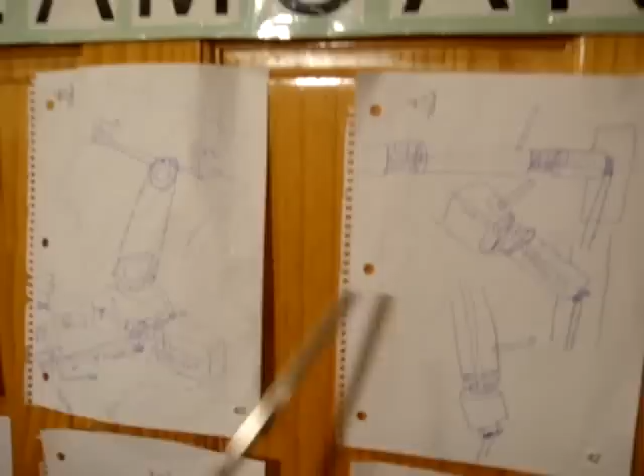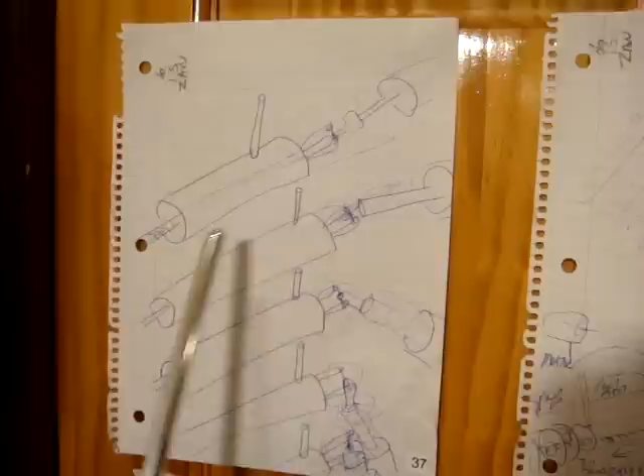These drawings here are the new steering system. This is a joy bar here. And what it does is, see this, the part sticking up, it will start going back and forth and slide right and left. This is also the joy bar. There will not be a steering wheel in the final version of the car.

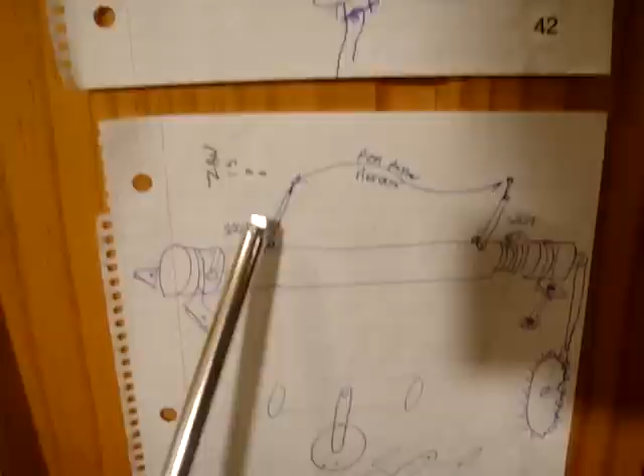And this is another drawing of the joy bar. If you see here, it's spring-loaded on both sides, and it's got two levers up. You just push the levers forward to accelerate and pull them back to stop it.

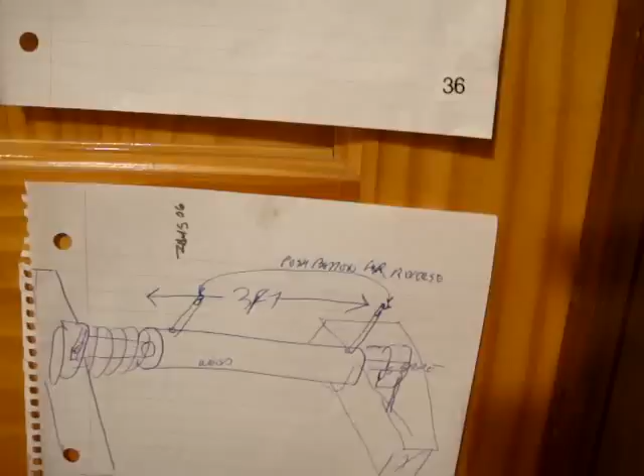Here's another drawing of the joystick, but in place. So it's anchored at both sides of the car. You're sitting approximately right here, and your feet will go under it. It's about 2 foot wide.

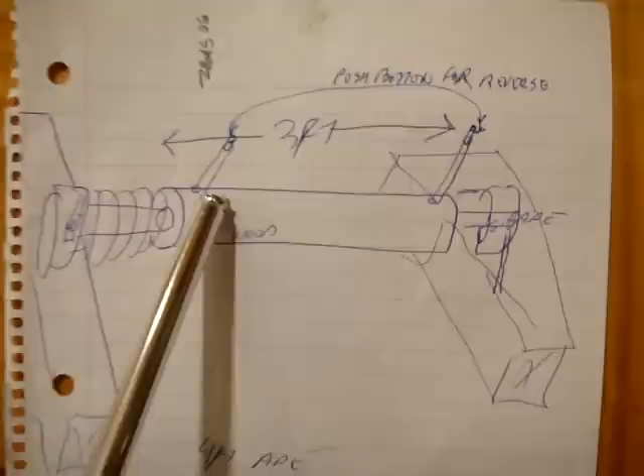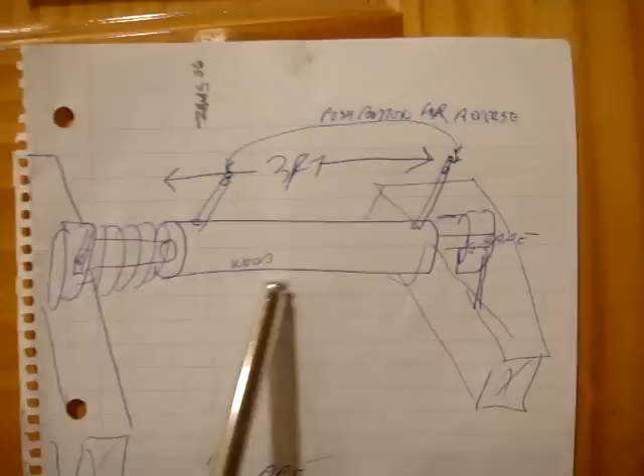And what it does, again, is this stick goes forward, or you can squeeze this bar and roll it forward to go forward, and pull it back to stop, and pull it a little back further to go in reverse. If you see on both sides, it's spring-loaded, so to get the car to turn, you simply move it right and left, back and forth, and that's how the car turns.

These are details of the control, and if you notice here, this is in an up position, to the left, to the left, to the left, to the right, to the right, to the right. This is showing you the control. This drawing here shows the butterfly switch, and we'll show you that in some other parts, and the solenoid.

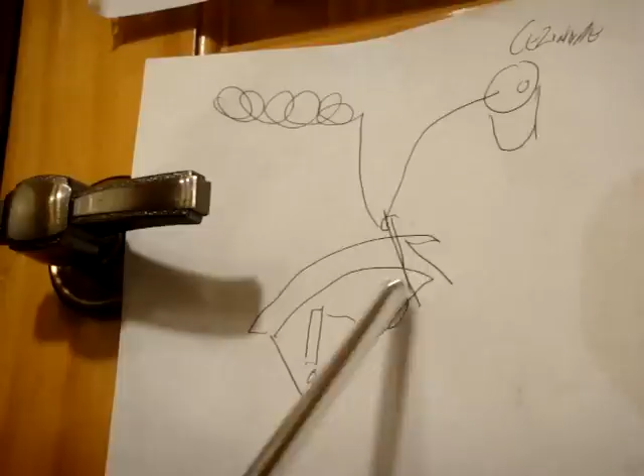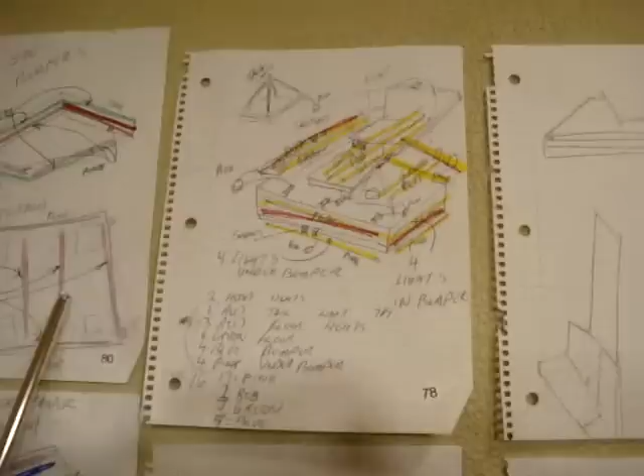Now here's some more drawings, and I'd just like to talk about different ones. This is the drawing of the seat in the center of the car. These are the neon lights that light the body. These are the 3 body sections and how they're placed. And then again, over here is how the top of the framing is above the car frame itself.

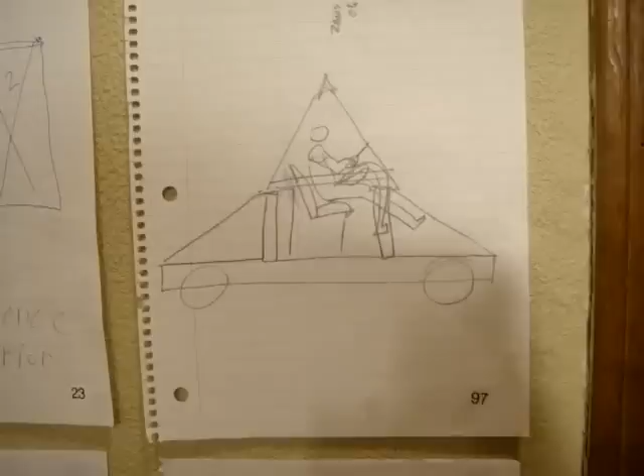This is a detail of the seat, trying to get a man to sit in the seat. Now from this drawing, go back to this drawing, and we're trying to set the man up so he sits in the seat properly. Over here is another drawing of the seat. Here's another drawing of the seat, and here's another drawing of the seat. So what we're doing is we're figuring out how a man sits in the car.

Now this is a photograph, but it's also turned back into a drawing of Gregory driving the car. And this is the final product. His head is back against the back. He's got plenty of space in front of the car.

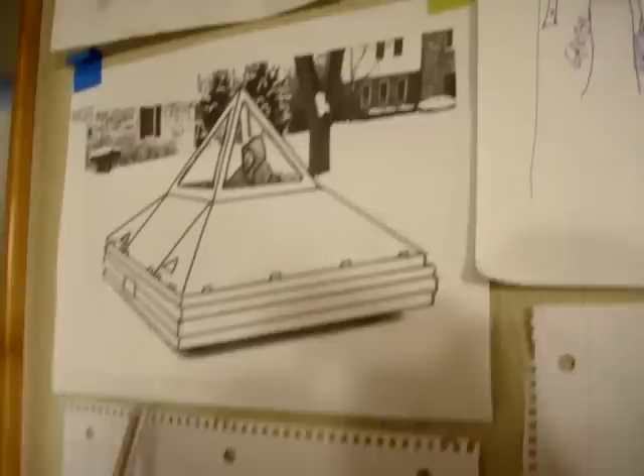Over here are some more drawings. And these drawings here are different parts of the frame itself. So the frame is listed 1, 2, 3, 4, 5, 6, 7, 8, 9, and 10. That's the amount of pieces that it takes to build the frame.

This is another detail of the frame itself. And then this drawing is showing the outside plexiglass around the bumper. Every one of these drawings has a purpose.

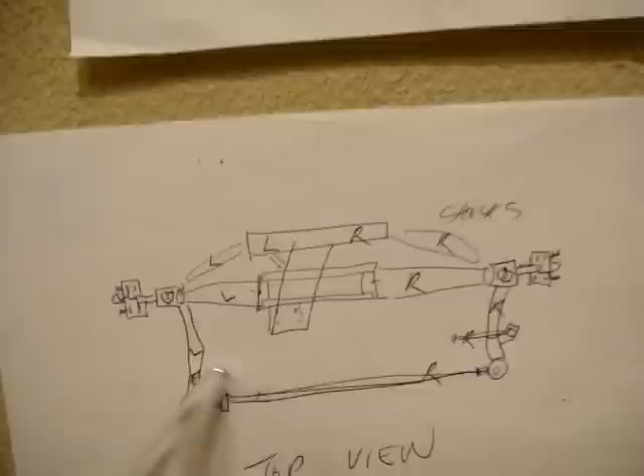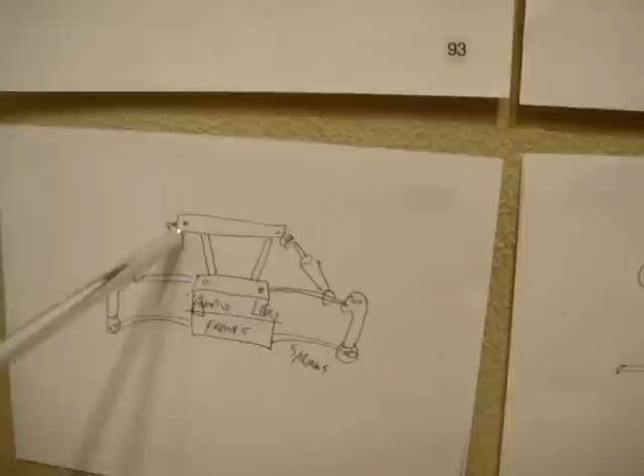This is the front steering mechanism of the car, and these are the individual components of the steering in the front of the car. Right here is also the front steering of the car and the braces that hold it up. These are the shock absorbers, and this is another version of the same thing. Exactly, here's the leaf springs here.

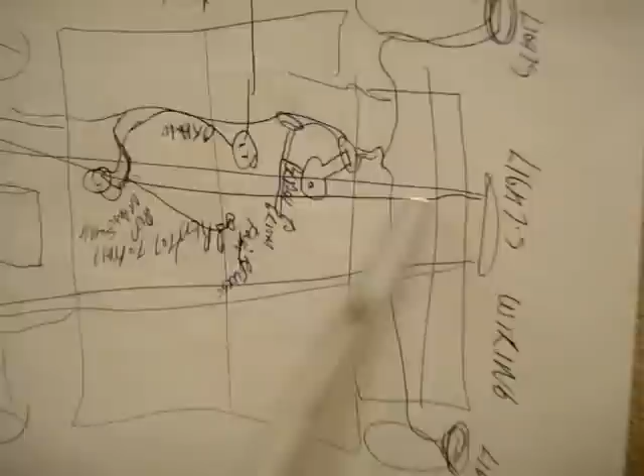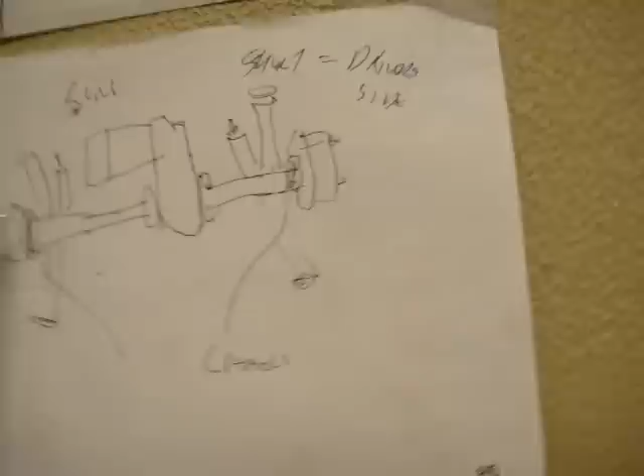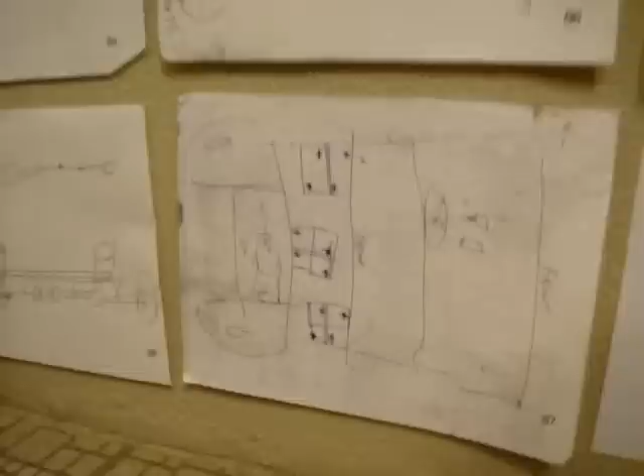And here is the rear axle also. This drawing is the front axle, and this drawing here is the rear axle, and then this drawing is placing the wheels and starting to allow space for the battery and where the steering column is going to go. These four actually are conceptual drawings before the car was actually built.

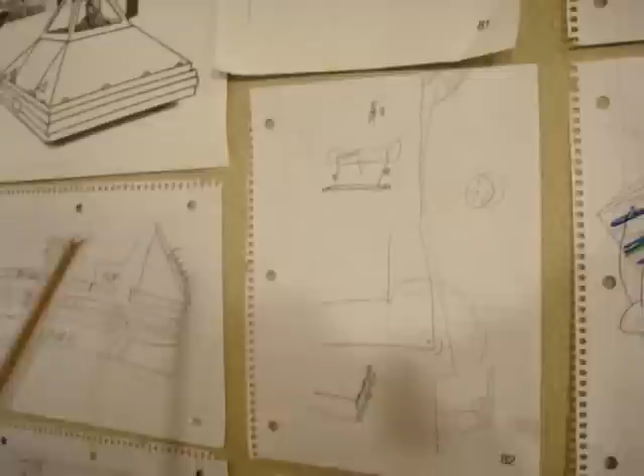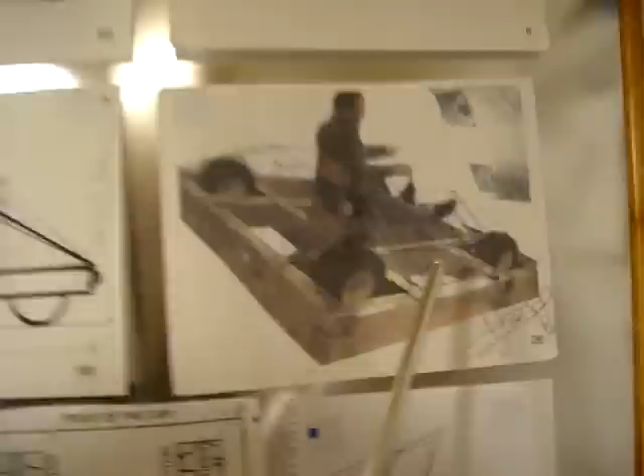And then up here again, this is a detail of one of the rollers right there, you see it, that will protect the car so it'll be able to go alongside an embankment or in and out of the tunnel. This again is the butterfly switch, and over here are some drawings of course, the body separately and the nose cone. Here's another drawing. This actually is a photograph of the frame, and it shows the substructure before the nose cone is placed in place.

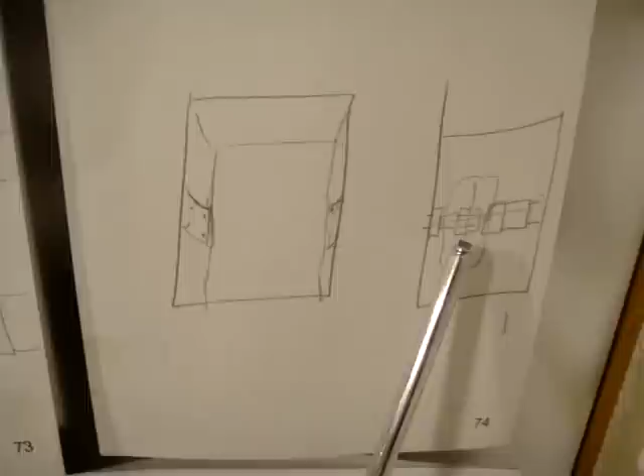Here's another drawing just to give us a feeling of the car that shows the body, and it shows how the cockpit will open. These two drawings here show the motor and the slot for the motors. There's a slot here and a slot here, and then here's the wheel and the motor, and here's two flat plates that bolt. These 4 bolts here and 4 bolts here to bolt the motor into place. This is almost the same one, but it's showing the motor in the hole, and here's the 4 bolts and here's the 4 bolts. 8 bolts, you'll be able to take this car apart.

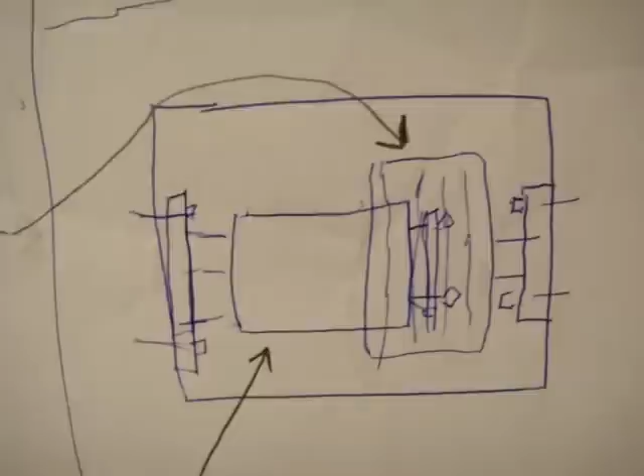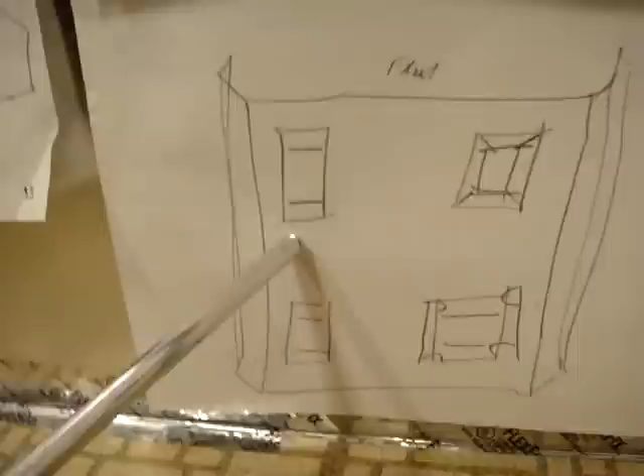Over here are the component parts for the bottom of the nose cone. This is a body where this part here will match onto this part here. This drawing down here is the car popping out of the tunnel. And then this drawing here is the bottom plate of the car. It's a solid steel piece. It will probably be built with 2 pieces, but we're showing it in the drawing in theory.

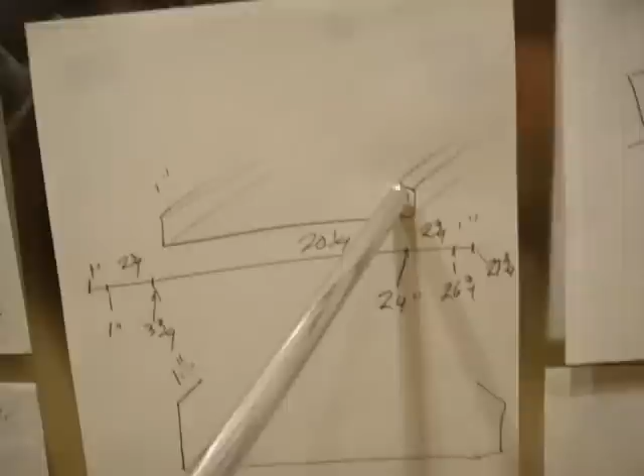This right here is the side protecting bars and the cage all the way around here. When the car is actually built, this will be 4-inch tube steel, and it's also showing the hinging to allow the flaps to open up. Right here is the other bottom piece, and here is how it bends up here and here. Here is also the bottom piece showing the 4 holes in it. This is the bottom piece too, showing the 4 holes in the corner of the complete unit.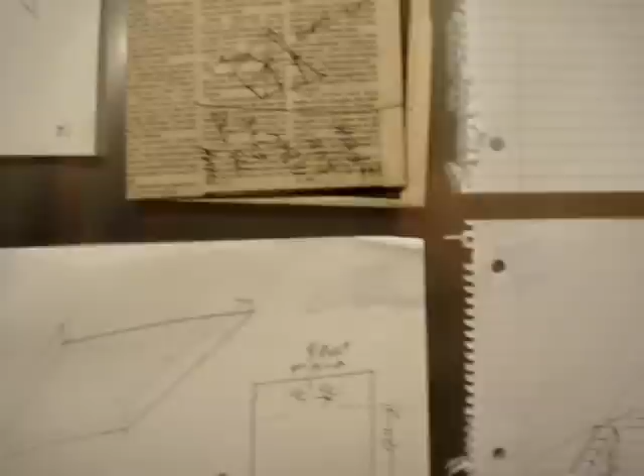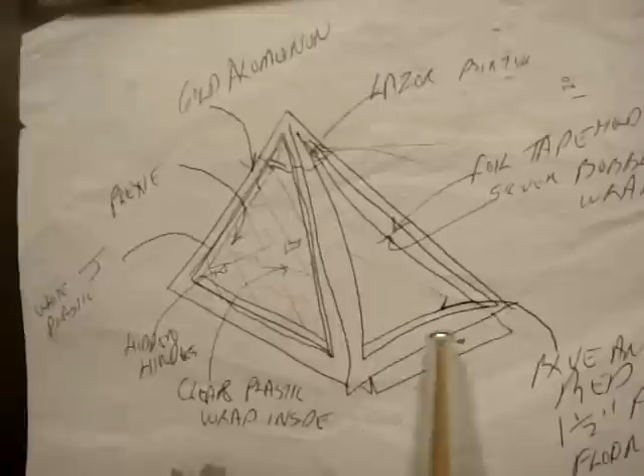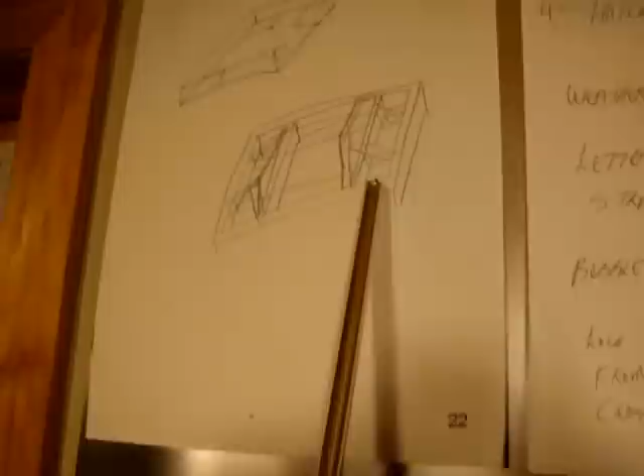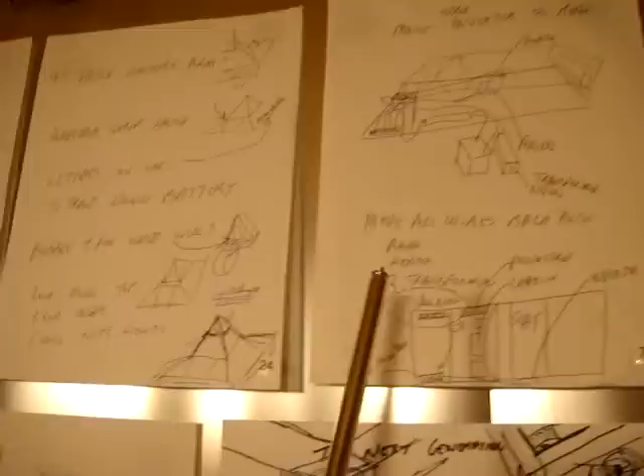Up here again are the components of the bottom body. So this will be my I-beam all the way around. This will be the piece that I showed you in the other drawing, and this piece that goes up on the bottom, and this is the bottom plate. This is also the bottom and the frame of the bottom, and this is a frame without the framing in it, and here's the first protective member. These are the cars, and adding the wheels to see how they're going to fit in here and here and here. And here now we're going to show you the car itself in a more detailed drawing.

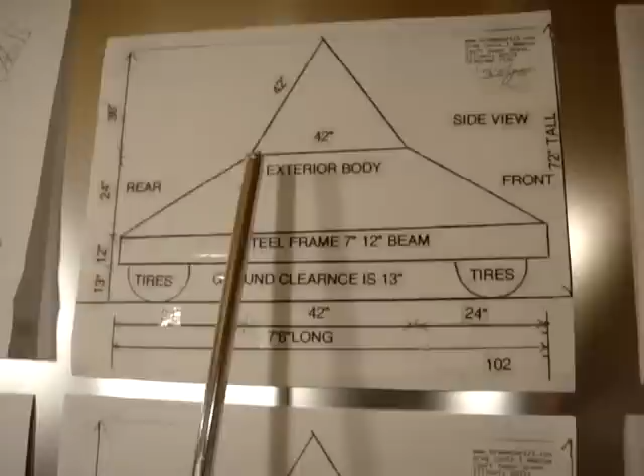You can see it's 7'6" long and 72 inches tall right here. And here's the parts, 13 inches off the ground, a 12-inch steel I-beam bumper, 24 inches from the body to the top. Now this is 24 in every direction. It's also 24 from here to here, and it's 24 up. The nose cone is 42 by 42.

And this is just some of the 100 drawings that we have, and I'd like to talk to you more. And I'm Greg Zanas, inventor.